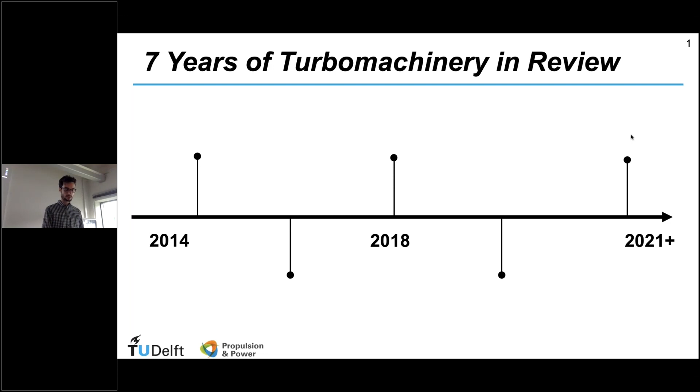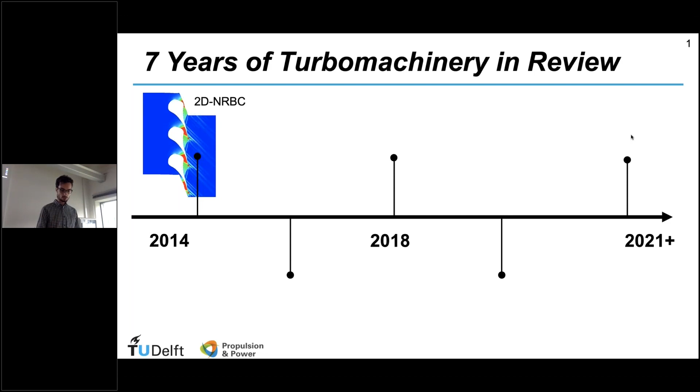Let me start by recapping what we have been doing in the past 7 years and showing you a bit the history of SU2 for turbomachinery flow. We initiated the development of turbomachinery features quite a few years back in 2014. The first features we implemented were two-dimensional non-reflective boundary conditions, because at that time we were interested in supersonic turbine applications.

Then along the years we moved on, and after that we focused our efforts on the implementation of mixing plane, and we achieved full functionality, full 3D mixing plane functionality within SU2 around 2016. Then around 2018, so close to those years, we were able to perform 3D steady state optimization with FFD, even for multi-zone problems, and to perform the first unsteady computations of Stator-Rotor interaction in various kinds of turbomachinery configurations.

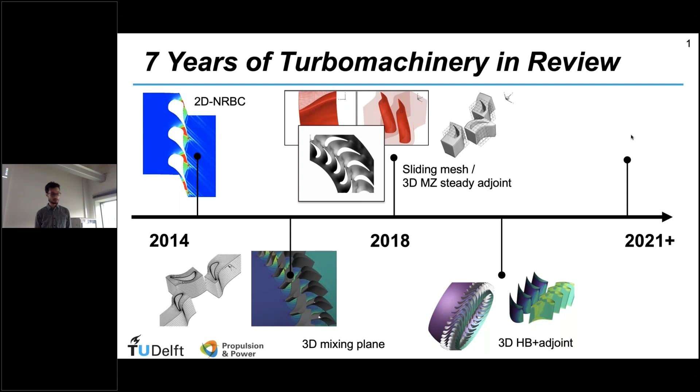Then more recently, we implemented reduced order models like harmonic balance for the efficient computation of unsteady turbomachinery flows and developed the related adjoint counterpart. Because of that, we went on and moved towards more multidisciplinary analysis and multidisciplinary optimization. Most recently, we have been able to do aeroelastic analysis and design with SU2, coupled to our CAD-based parameterization software to enable aeroelastic design optimization.

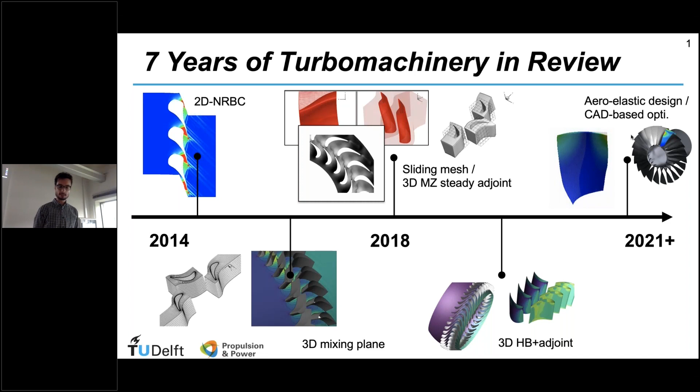And Nitish, in the following, will show you applicative examples of what we have been doing in recent time.

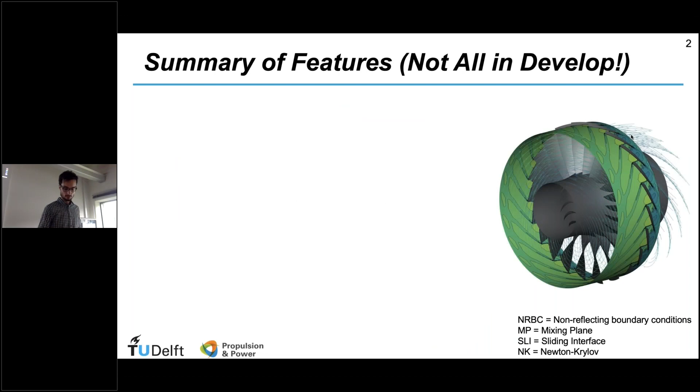So as a recap for the community attending the talk today, what is available within SU2 as of now with respect to turbomachinery features? First of all, we have a bunch of features: non-reflective boundary condition, mixing plane, sliding meshes, harmonic balance for even pitches. Then we also inherited the most recent implementation of Newton-Krylov solvers, and we have been able to improve the speed and robustness of the turbomachinery flow computations with Newton-Krylov.

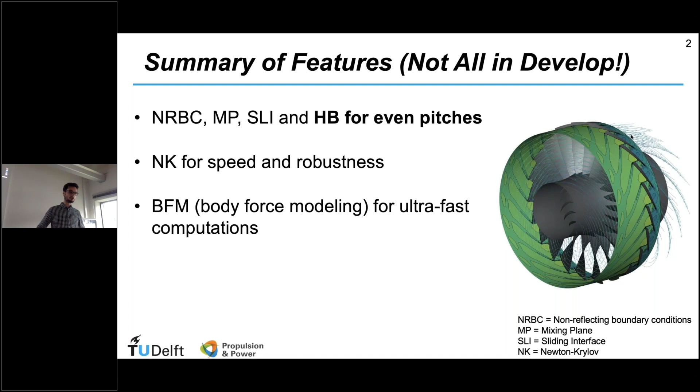We also worked on implementing some ultra-fast methodologies for computing turbomachinery flows, relying on what is called body force modeling. All of these features come along with the discrete adjoint counterpart. So nowadays, not only can analysis problems be run with SU2, but also design problems. The code is also equipped with models for computing thermophysical fluid properties with equations of state other than the perfect gas law.

Now, the point is that, yes, we have a bunch of features, but not all of them are available in the develop branch for one reason or another. Some of them, like the harmonic balance, are spread over a few branches.

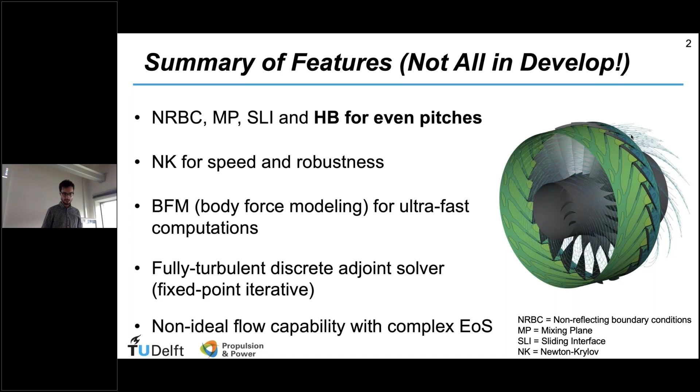And that is exactly the reason why a few months back, we started a project that we baptized SU2-Evo, with the final intent of merging the most important turbomachinery multi-zone features into the V7, into the latest version of SU2. In parallel to that, we are also interested in adapting the multi-grid capability for enabling multi-zone periodic calculations. This effort has been pursued in collaboration with Imperial College and University of Cagliari in Italy.

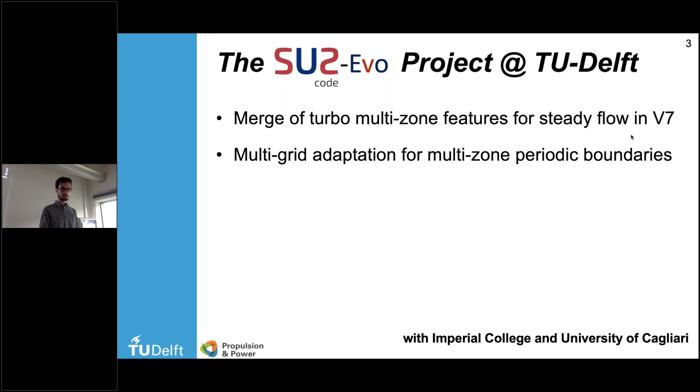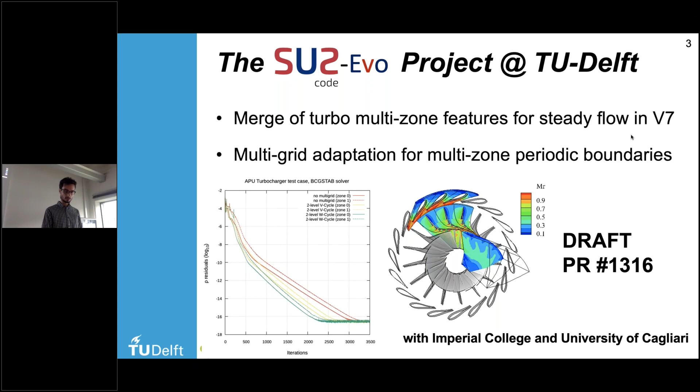And now, having said that, I would like to move on to the core of the talk. Nitish is going to illustrate what we can do nowadays in terms of optimization with SU2, with a couple of applicative examples. And I will close this talk by explaining what, in our opinion, should come next and what will come next.

Let's look at the design chain used for our application. We have 4 blocks: surface deformation, volume deformation, grid movement, and flow solver, in which we go from alpha, a set of design variables, to our objective function J.

Grid movement is necessary only if we want to do an unsteady simulation with motion of the mesh, but it's not required if we're doing an unsteady simulation with some kind of inlet unsteadiness, or if it's a steady state problem.

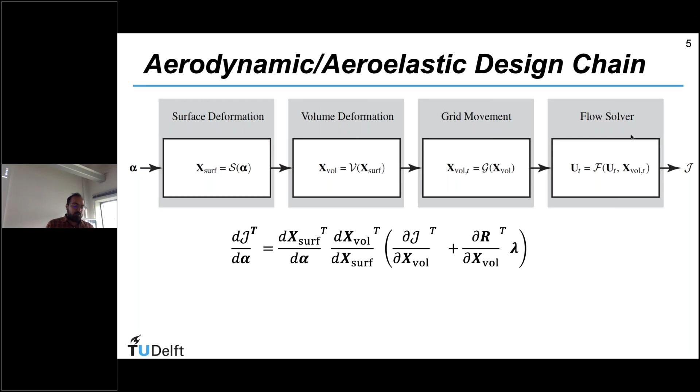Over the years we had a lot of problems with free-form deformation boxes for parameterizing the blade surface, primarily because it was very difficult to put certain kinds of constraints on the parameterization. That's why we developed the software ParaBlade in the last couple of years, which contributes to this part of the equation.

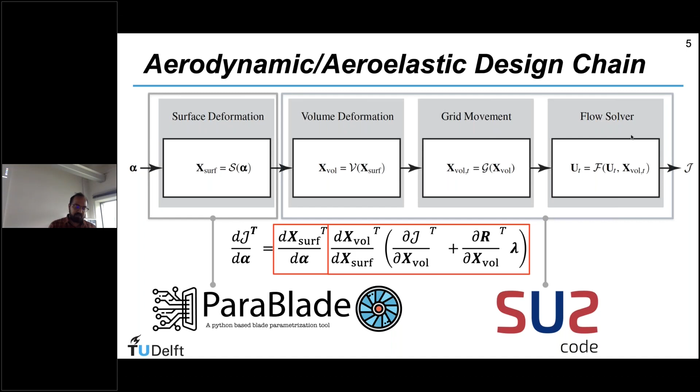The later part of the equation is coupled with ParaBlade so as to obtain the final sensitivity of the objective function with the design variable.

ParaBlade is a parameterization tool in which we have a camber line and thickness distribution, based on which we can have a 2D definition of the blade. This 2D definition is extruded at every span and connected by a certain variation in the properties in the span-wise direction, using which a full 3D definition of the blade can be obtained.

ParaBlade might sound like a smaller name, suggesting it's just used for parameterization, but that's not true. There's another part of the code that does the optimization, which orchestrates the entire optimization process, from parameterization to getting the sensitivities, to running SU2, and then doing the matrix multiplication and providing this back to the optimizer.

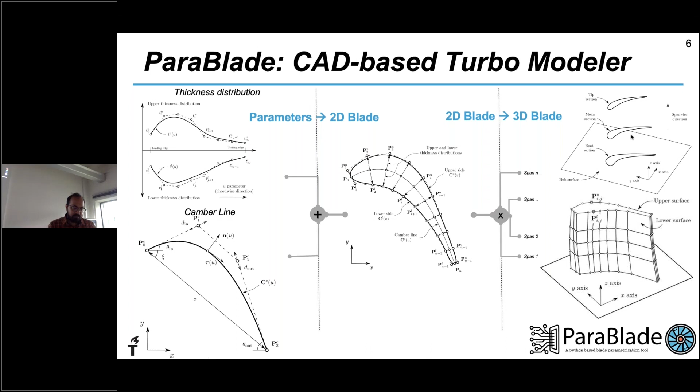This helped us detach from the ad hoc shape optimization Python file within SU2. Now with this, we can have more flexibility with respect to the kind of algorithms we can use, but also with respect to the kind of problems, for example multi-point and multi-objective optimization problems.

Based on that, I'm going to show you 2 examples: one is an aerodynamic shape optimization, and one with aeroelastic.

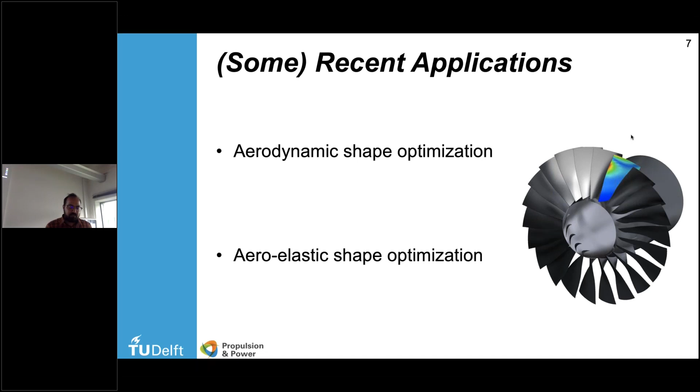For the aerodynamic case, we've been interested in this multi-stage computation for a very long time. In this study, the idea was to compare the mixing plane approach with the harmonic balance approach and see what kind of differences in geometry we can get in the final design.

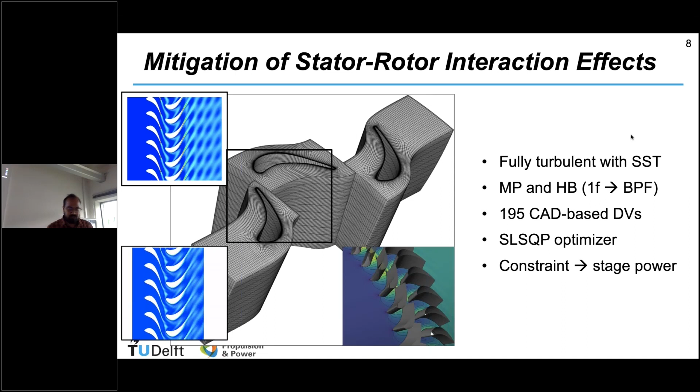In this case, we have approximately 195 design variables for all 3 blades that you see here. We've been constraining the power, specifically the stage power, to have a feasible design.

In the past, Antonio already did this and he has well documented the results, which kind of give the amount of memory consumption and the number of frequencies required to reach almost the same level of accuracy as an unsteady problem.

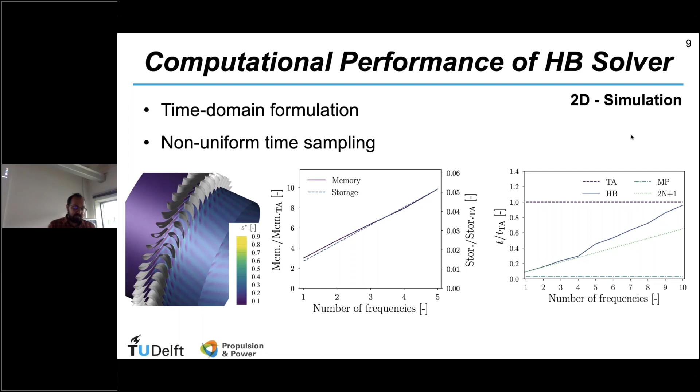However, when we go to 3D, things become much more difficult. Over here you see the temporal cost of running adjoint and harmonic balance, mixing plane and harmonic balance with adjoint and the direct solver.

We set a limit for ourselves that we cannot go beyond 72 hours, so we cannot go beyond 3 days for one design step. That's where you see different meshes, M0 to M6. M0 is the only one in which we can achieve a harmonic balance solution in less than 3 days, whereas M1 just goes a little beyond 3 days.

Also, with respect to RAM consumption, we set ourselves a limit of 128 gigabytes. You can see here that the harmonic balance solver, for the second mesh, is almost consuming all the RAM we had set as a limit.

This highlights how expensive, temporally and in terms of memory, a harmonic balance adjoint computation is. This doesn't only show a problem, but also shows an opportunity, which is where we can work in the future to increase the speed of these solvers and reduce the memory consumption.

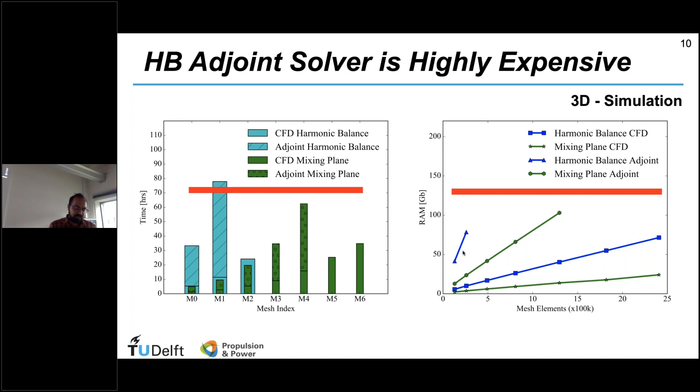Now, the final result looks fantastic, because over here what you see is the 3 blades: the Stator 1, Rotor 1, and the Stator 2. With the harmonic balance, we were able to obtain a 4.9% improvement in performance, whereas with the mixing plane, we had a 3.9% improvement in performance.

Now, the most visual difference between the blades is that the rotor with harmonic balance has this very typical S shape, whereas the mixing plane rotor blade has this inverted C shape. We were expecting to have more answers from this simulation, but we have more questions now as to why these two radically different blades were obtained. One of the primary reasons could be how the mesh is managed at the hub and shroud surfaces, which has been a limitation for a long time for turbomachinery problems.

In future, we would like to simulate both these blades back to back in a time-accurate solver, probably within CFX, to have a good, valid comparison of which design actually performs well, because harmonic balance is also a reduced order method after all.

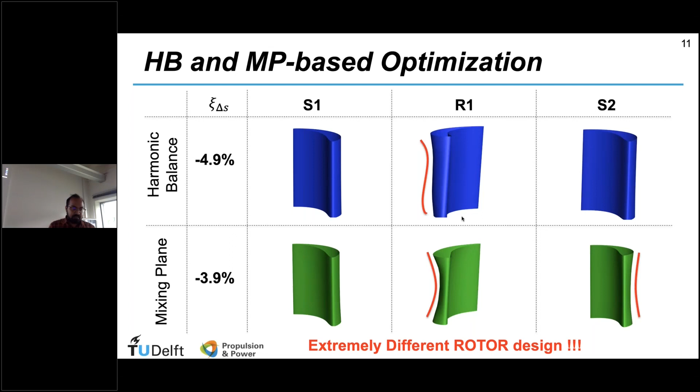Now, about aeroelasticity. Aeroelasticity is another important aspect of turbo machines. There are two very common phenomena: forced response and flutter. And then we solve the equation of motion to get that.

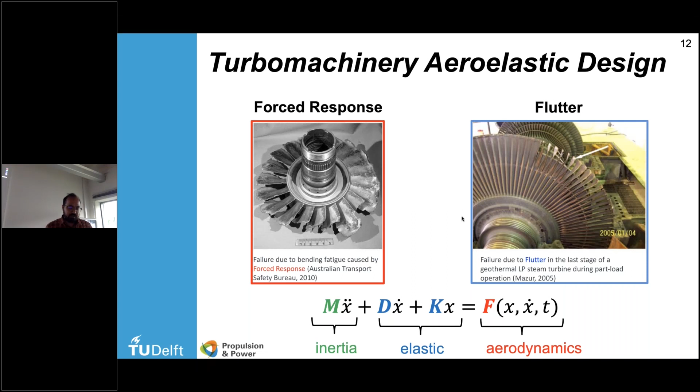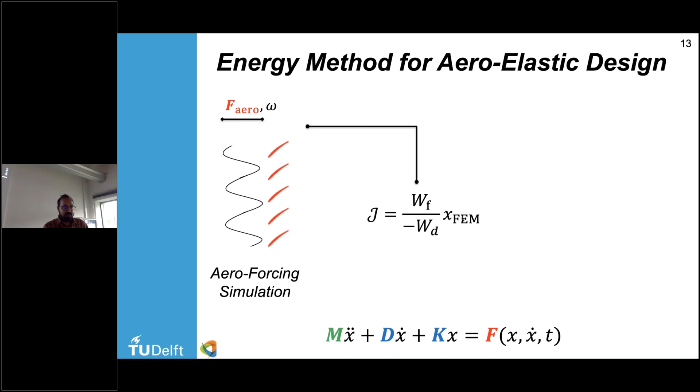This is also where I did this part of the work in my PhD thesis, in which I constructed this reduced order objective function, based on the energy method, which gives the work done per cycle of a forcing computation — a blade which is isolated and is under the influence of an inlet which has a certain kind of frequencies or time-varying inlet.

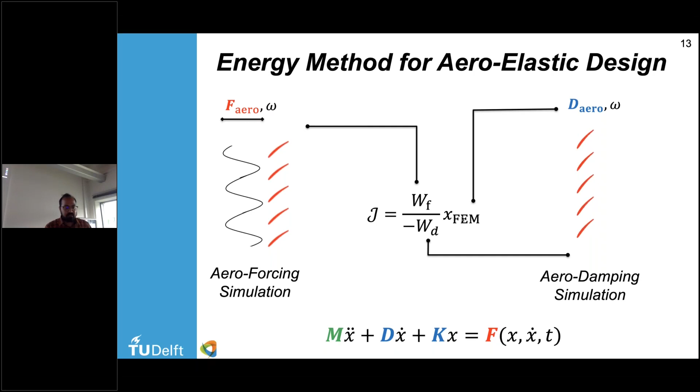Now, this was all in 2D, but in 3D, the problem becomes more complicated. In this case, we have 22 rotor blades, which is interacting with the wakes from 11 IGVs.

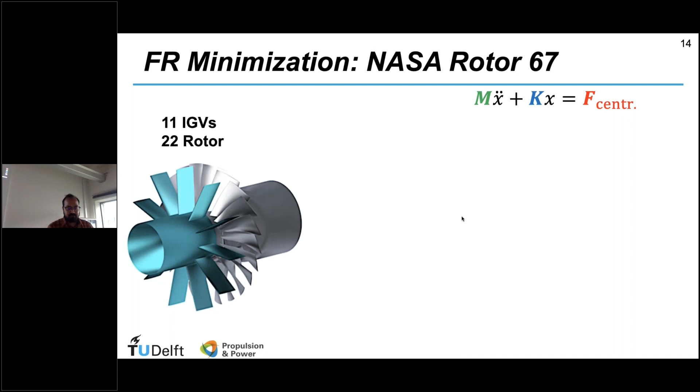If you do a Campbell diagram of this system, you can obtain the frequency crossings, which is nothing but the frequency at which you're going to have resonance. In this case, we get the fourth mode, which has resonance with the 11th engine order. This is the third bending with the first torsion mode, which coincides with 90% of the speed of rotation of this blade, which is the NASA Rotor 67.

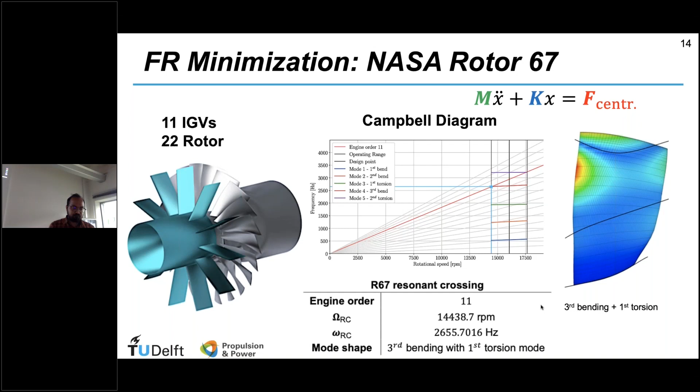Based on this, I was able to simulate this vibration that was obtained from a commercial software in CFD so as to obtain the unsteady effects. And then I used this unsteady value to compute my objective function J, which I showed previously.

Now, I would like to highlight a few points here. The RAM consumption for running the adjoint of this problem was close to 250 gigabytes, which is very close to the capabilities that we have at our disposal.

Now, some of the key features that this particular branch of SU2 implements include: solution of flow and adjoint with deforming grid for unsteady problems, especially with harmonic balance; imposed user-defined mesh motion so as to define the custom vibrational motion that was obtained from commercial software; and the spectral grid velocity computation, which is perhaps the most computationally expensive part of the entire solver.

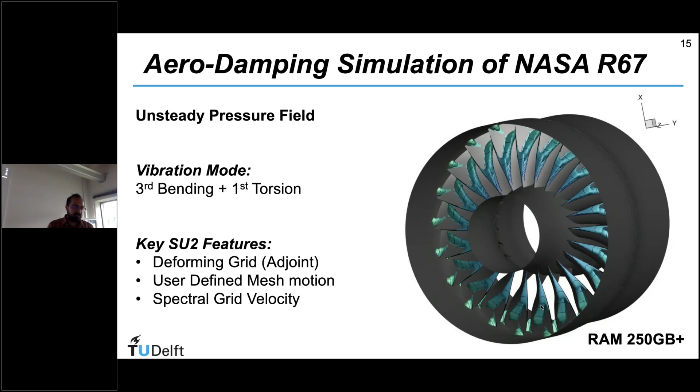Some quick results: I was able to obtain a 0.2% decrease in the improvement in the forced response objective, and a 0.25% reduction in the aero forcing work.

Now, there's a big caveat here. These results were only after 2 iterations of my optimization, and after that, the optimization had to be stopped. That was primarily because the mesh elements became way too coarse or way too bad for the adjoint to converge. So these are some of the problems that we see coming forward to us, and we wish to work on them in the near future.

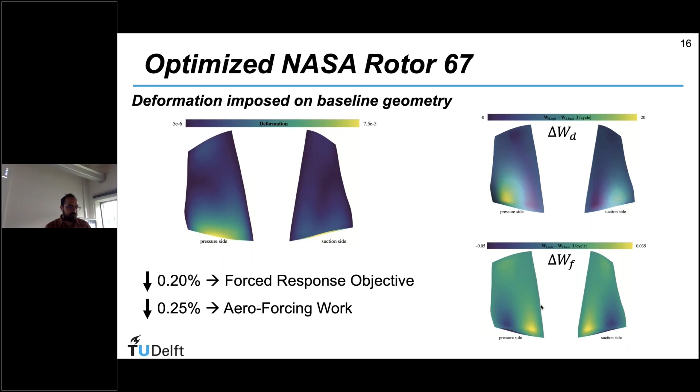In the past 7 years. And these are not really key technical takeaways, but key takeaways as a scientist operating in an open source, open association, open community like SU2. We could have been at the edge of turbomachinery simulation and design optimization methods because we based our developments on the ground set by this very large community, and we are very thankful for that. It might be that the learning curve is steep at the beginning, but it pays off in the long run. This is a strong message we'd like to share with everyone attending the conference today.

Second, possibly not a surprise for people dealing with internal flows and statistically periodic flows like turbomachinery flows, where turbomachinery is inherently a beast. We have been struggling a lot with the computational performance of SU2 for turbomachinery flows, but we are glad to say today that there's been a quantum leap in performance with the introduction of V7. We are very hopeful that in the future we'll be able to improve further, thanks to the contribution of many of the developers who are also here today.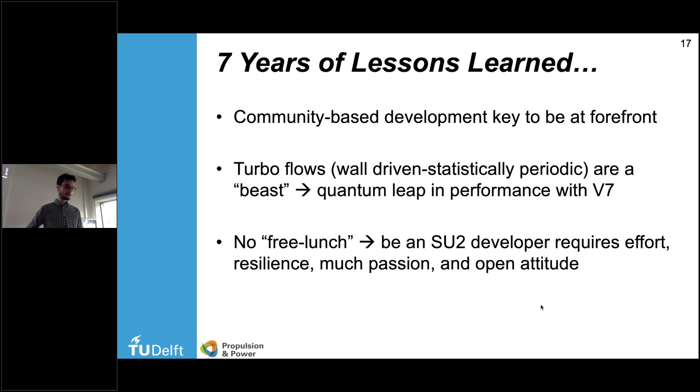There is no free lunch, as I was saying. Becoming an SU2 developer requires effort, resilience, a lot of passion, and a fully open attitude. So there is no free lunch, but in the long run it pays off, and it's really enjoyable to contribute to the advancement of knowledge in a very collaborative way.

Now, for more technical tips, there are two well-crafted presentations by Pedro happening at 9:15 PDT, and I warmly invite everybody here to follow them.

Now, on a more technical side, what are the challenges ahead? What do we envision as the challenges we still need to overcome to have a tool at our disposal that enables efficient computation and design optimization of complex turbomachinery configurations. First of all, we should invest time in making the flow solver even more robust. V7 has been a great addition, but we need to invest more time and effort to achieve that.

First, we should focus on the flow solver, because the adjoint counterpart—and there will be a talk on that, the discrete adjoint counterpart—will inherit those improvements. So the adjoint will intrinsically benefit from improvements at the flow solver level.

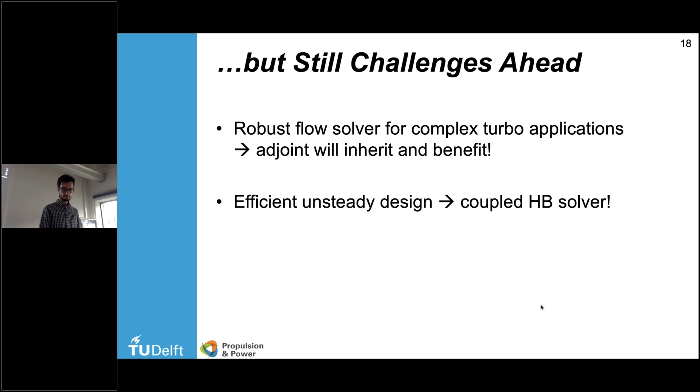A lot of effort and focus must also be on the unsteady counterpart. Unsteady flows in turbomachines are extremely costly because you need to run many revolutions, and there is much that can be done there, especially related to the harmonic balance solver, which is in SU2 as of now.

When it comes to design optimization, we are still wondering whether mesh deformation is the way to go for turbomachinery design problems. Possibly not. If not, we would need to think about remeshing, and I think Pointwise can play a big role there.

Hopefully, with the contribution of many, this won't take another 7 years. Otherwise, we all become old.

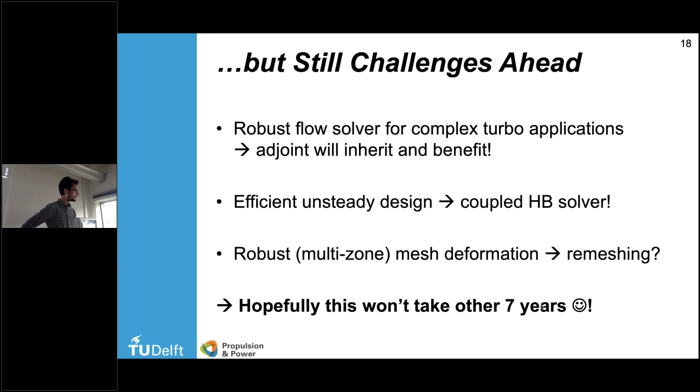But before leaving you, I would like to show a sneak preview of what is upcoming. Luckily, we have been able to attract the interest of some Chinese colleagues, now Chinese friends, and we'll perform a blind validation of SU2 with respect to an open test case, the TU Darmstadt supersonic compressor, jointly. Nitish and I, and two colleagues in China from NPU, Northwestern Polytechnical University, will present the results of this blind validation study at the next GPPS conference, and then we'll release everything to the SU2 community.

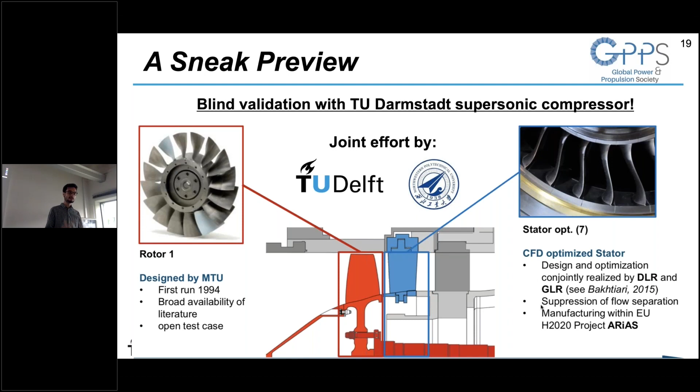Thank you very much, Matteo and Nitish, for your nice talk. We have a question from Pedro Gomes that really deserves an answer. I'll read it: Why the heck are these features not in develop on GitHub? Why have we not heard about them before via GitHub issues or the developer meetings? Why have you not commented when people, that is me, Pedro, were working on similar methods, namely Newton-Krylov? Come on, folks. In other words, what can the foundation or the community at large do to make your life easier?

I think his concerns are pretty genuine. But right now I'm the only one here working exclusively on the code and trying to merge everything together, so it's a bit too much work on me, I would say. But let's say I'm getting there. I'm sure pretty soon we'll have most of the features in develop. We already have some of the major ones in develop, which is open in a PR draft.

With respect to the Newton-Krylov, we have not implemented something ourselves. It's something we have been testing from one of the previous implementations, so we are testing those methods in our test cases. Do not think the message went wrong that we're implementing our own - that's not true. We are still with the foundation. Do not think otherwise, Pedro.